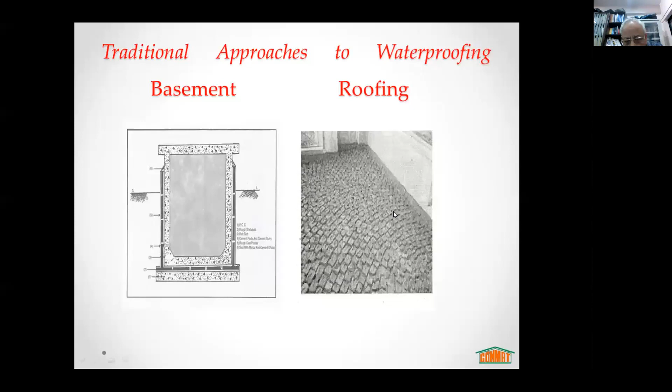What happened was that when we started doing waterproofing of buildings and concrete structures, we primarily focused on basement and roofing. These traditional approaches made use of materials that are really conventional, for example brickbat coba, mud phaska, lime concrete, China mosaic tiles for roofing purposes. For basement, box type construction using Shahabad stone or PCC or similar kinds of materials. With these materials, what we ultimately try to do is create some water barriers, but we certainly do not do the waterproofing as we understand today.

With these kinds of approaches, there is a lack of durability first of all. Second, there is a lot of additional dead load on the system itself, the building structure. And obviously the repair and maintenance is a big issue. The approaches are essentially very cumbersome and labor intensive.

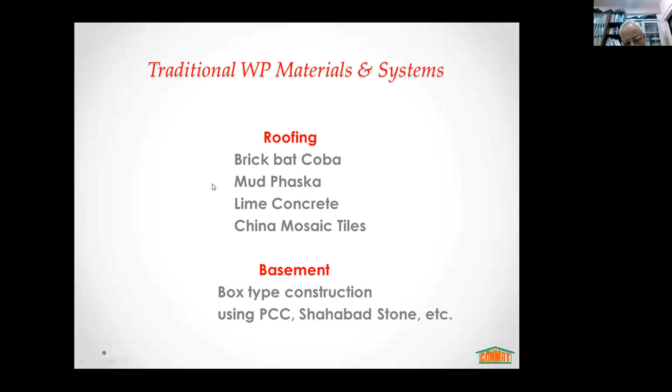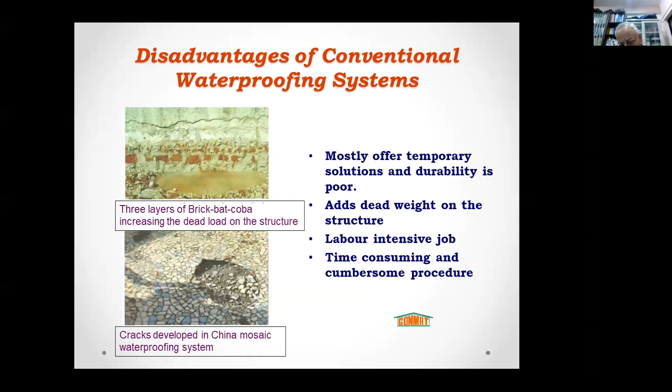So progressively what has happened is that we have tried to avoid some of these disadvantages of conventional waterproofing. This has been possible with the concept of building envelope. The concept of building envelope is that you don't really consider individual elements of the structure for waterproofing purposes. All that you do is consider the entire structure as a whole, and try to take care of the substructure and superstructure, or below grade and superstructure, and also all the joints, flashes, seams, etc.

So you take a holistic view of the entire building envelope. Here it's not only preventing water infiltration, but you also try to control water vapor transmission, heat and airflow in and out of the interior spaces, providing a shield against ultraviolet rays or excessive sun rays. Structural integrity is a very important part of the entire building envelope, and you also take care of the necessary aesthetics in your construction and structure. That's how you look at the building envelope as a whole.

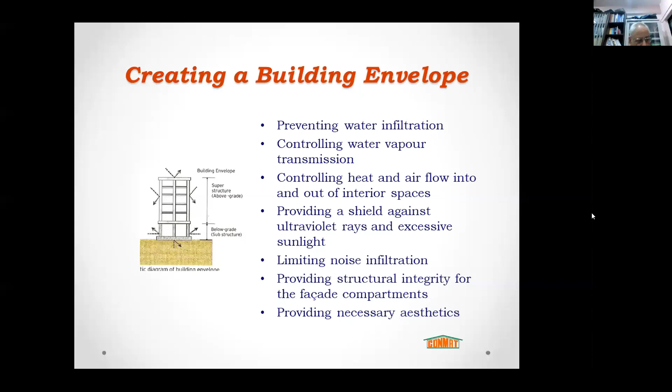Just to refresh your mind, we talk about two systems: the waterproofing systems and the damp proofing systems. The intrinsic difference between these two is that waterproofing protects us from the hydrostatic pressure of water. When there is no hydrostatic pressure, but you resist the passage of water, we talk about damp proofing. I specifically brought this in today because sometimes we use these two as synonymous, and sometimes very loosely. I even see an ad these days where two persons are talking - one about damp proofing and the other about waterproofing, but both are talking in terms of the damp proofing material. So to that extent, we need to differentiate between these two.

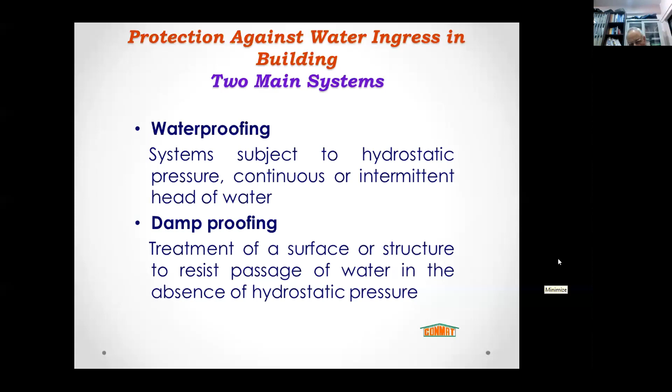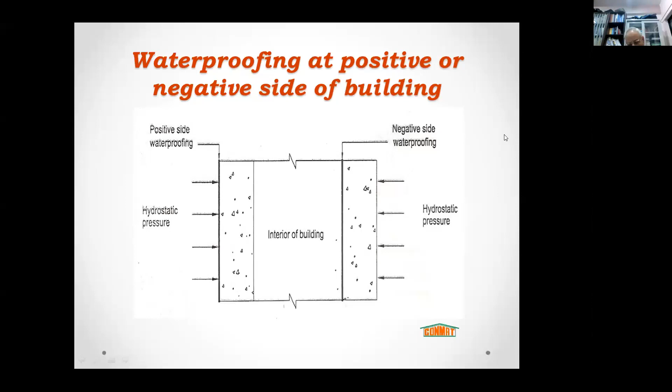Another basic thing to which I would draw your attention for understanding the rest of the things is about positive side waterproofing and negative side waterproofing. On the hydrostatic pressure side, if you are putting the barrier between the source of water and the interior of the building, that's the positive side. When you are doing interior barrier with your concrete and the source of water on the other side, we talk about the negative side. By and large, for all practical purposes, when we talk about basement or roof or anything, we are essentially talking about positive side waterproofing, although the negative side also has to be considered for the basement part, where the walling is inside the ground and there is no other way of doing the positive side.

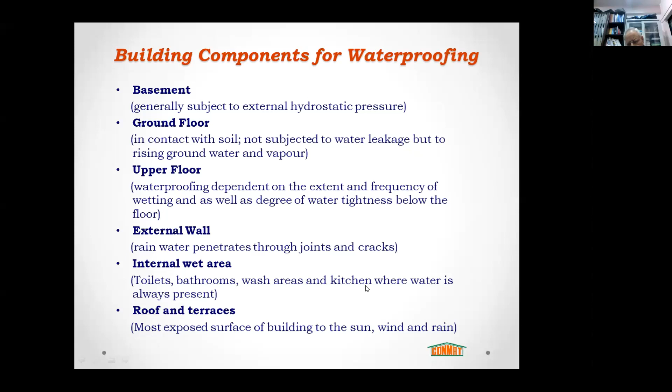When we are talking about the internal wet areas, we are talking almost all the time about water being present in the system. Roofs and terraces, it's not only water, but sun and wind have their own effects and problems. So it's not really one shoe fitting everyone everywhere. You have to really think about different treatments, different materials. You will have to observe the demands of that structure or building component and proceed accordingly for the waterproofing. But ultimately, you have to bear in mind that you're looking at the total system in a holistic manner, and not just a part or component of the system.

With these initial words, I thought I'll just now say a few things about the modern waterproofing materials and systems. It's simply mind-boggling. Let me start off mentioning about that, let me start with the first one.

Let's talk about the preformed sheet membranes, because this has been again a conventional approach, particularly for roof waterproofing, or even for that matter in the basement. What we started off with was the hot applied built-up bitumen and felt membranes, in other words, the bitumen saturated felt layers were joined also with hot coal tar pitch or with oil derived asphaltic bitumen. So these kinds of systems have been in use for a pretty long time, and it's not that they are not being used even today. But the trend is that from, say, the 1990s, these kinds of systems have lost their popularity, particularly because of the release of VOCs, or volatile organic chemicals, which cannot be totally avoided in this system. And that's a taboo environmentally.

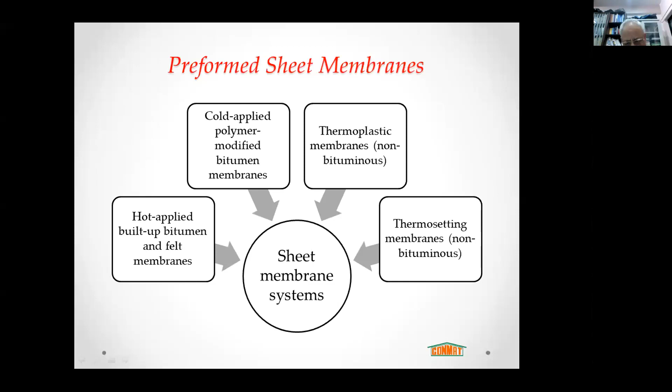So as a whole, if you see today, the polymer world has opened up a very large window for waterproofing, while earlier we were more focused on either coal tar pitch or bitumen, asphaltic type. We have now progressively moved towards even non-bituminous systems and total polymeric systems, but these are also complex in their synthesis and making. However, they have made a sea change in meeting the environmental demands.

But the preformed sheet membrane technology has its own limitations, particularly the vertical application of these materials becomes a big issue, big problem. In fact, blind walls become a big problem. So therefore...

The further developments that have taken place move towards liquid applied membranes. And when we talk about liquid applied membranes, we are not really changing the entire concept of chemistry—the chemical concepts we talked about, either the polymer modified bitumens or the thermosetting and thermoplastic polymers.

In fact, we have added further the silicone variety to that, and we have added polyurea to the entire group of materials. With that, today we can make either bituminous binder-based liquid applied membranes or coal tar pitch-based liquid applied membranes.

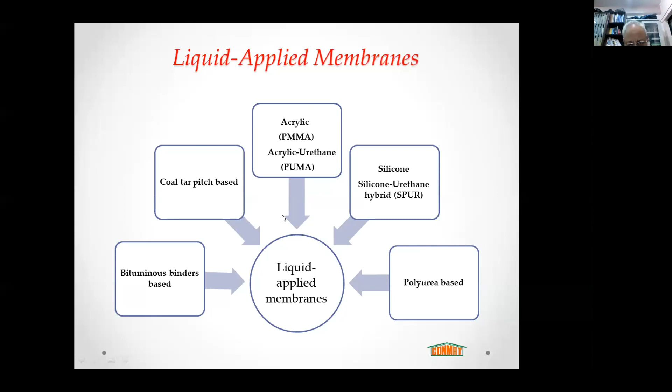The third category, which has added to the entire world of options in waterproofing, is what we call integral waterproofing materials. And here, it's my reminiscence that my company, ACC, was the first in India to introduce integral waterproofing, in a manner of speaking, at the technology level available at that time. I'm taking you back to 1959, when ACC introduced a product called AquaProof.

This was basically a lime stearate type of material for integral waterproofing of concrete. You can imagine how far-sighted an approach the company had even those days. But I'm very happy to learn now that technologies have improved, the knowledge of chemistry has improved, and today ACC has come back to integral waterproofing systems.

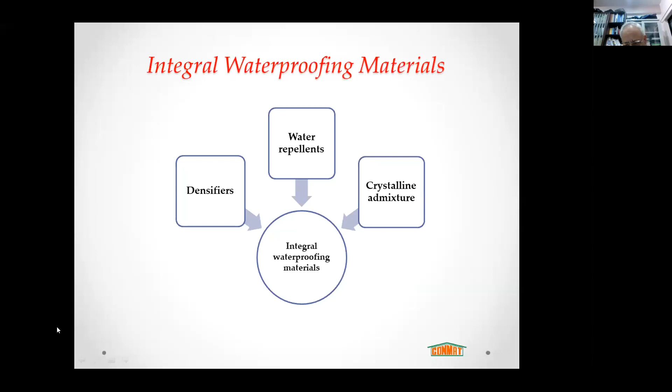That's the clay-based waterproofing system. Unfortunately, it's a highly potential area, but least worked upon and least researched, according to me. What we are practicing in a limited manner is the bentonite-based waterproofing systems. Here, either prefab panels or trowelable mixtures, all kinds of things based on bentonite composition of clay are available, and they may be made use of.

That's known to a certain extent and practiced also to a certain extent, but being worked upon very intently in some research areas are the asphalt clay emulsions or rubber clay composites. These are the kinds of materials which will go a long way in meeting our environmental challenges and demands, particularly if non-bituminous. A lot of work is being carried out on this system, but it hasn't really come to much practical use.

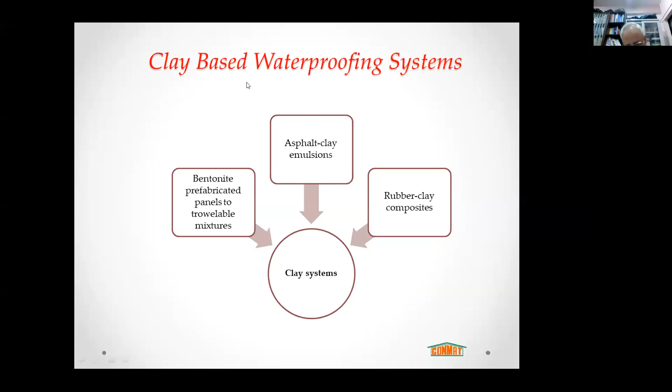Next one, please. The other part I thought I must quickly go through is the joint sealing solutions. You need not be told, I believe, as civil engineers, that joints are the weakest areas in our structures, unless you have handled them very correctly from the very beginning. You need the right kind of material for the right application for solving the problems of joints. Here also we have a plethora of choice.

For example, the sealants can be silicone-based, urethane-based, acrylic-based, or polysulfide-based. There are many options, and within each, there are multiple options. Particularly, what is being widely used is the polysulfide-based systems. Polysulfide, for the non-chemists here, is basically a complex chemistry of sulfur and hydrocarbons, and that's the kind of material very much in use.

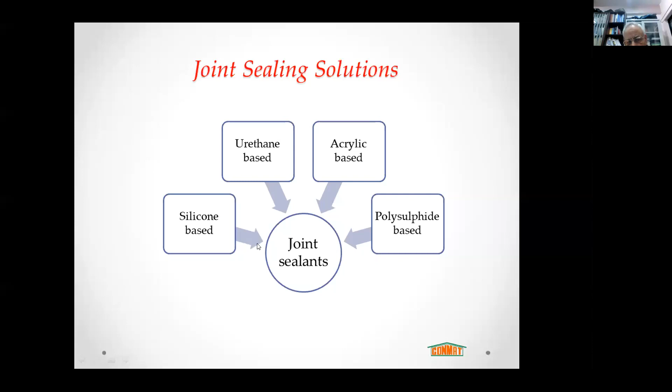Apart from these, next one please. I must quickly take you at least to the title, polymer modified cement and concrete. This is again a hugely potential area where you use either a latex, redispersible polymer powders, or water-soluble polymers, and you can really change the behavior of your cement and concrete, particularly for concrete decks, or for that matter, even concrete wall blocks or swimming pools. These are some of the areas where these kinds of materials provide a lot of advantages. It's not just will provide - they are being used in many circumstances, particularly in bridge decks and all that. But still, there are many reasons why it is not being used to the extent you need to use them.

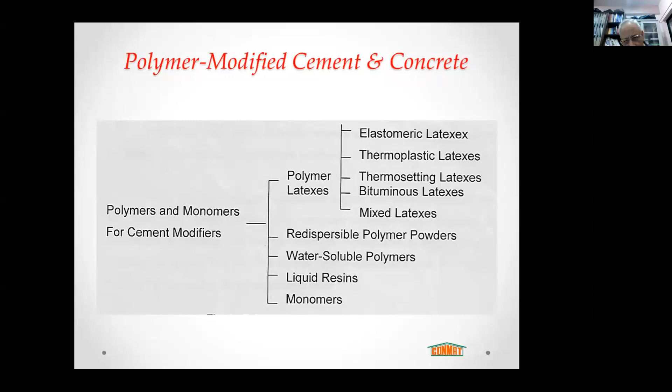Next one, please. Let me quickly take you through the specific advances that we have talked about. We have talked about the bitumen modifications, the bitumen to polymer transition, the single-ply TPO roofing membranes or thermoplastic polyolefin roofing membranes, and the latex composition expansion - a huge expansion available before the formulators. But what is extremely important is the high performance acrylic polymers, polyurethane versus polyurea, siloxane and silicones, and polysulfide polymers we have talked about.

Now, the acrylic polymers today are considered almost synonymous with high performance polymers. Why? Because basically the material can be formulated in numerous ways, and it can be really hybridized with many other materials, and you can really create wonders with the acrylic polymers.

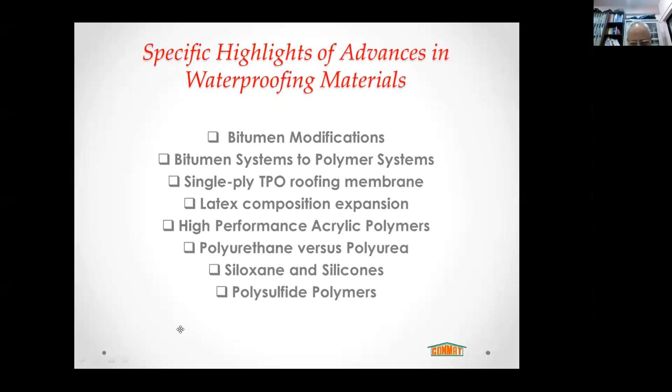Shantanu, do I have a little more time, and can I cover a few more slides? Sure, sir, sure, please continue. Okay, yeah, sure, please continue. Let's come to the next one.

Since the material choice is extremely wide, you need to have the right criteria for selecting the materials. Material properties, particularly permeability, tensile and elongation properties, resistance against atmospheric and sun exposure, resistance against perforation and laceration, and durability against aging and exposure conditions - to my mind, these five material properties are extremely crucial, and they vary from product to product, and we need to look at some of these things properly.

But that by itself may not really give you a satisfactory result, because there are substrate conditions which need to be really looked at. What kind of usage we are going to put this material into is important, and what kind of environment these materials are going to face - that again is very critical.

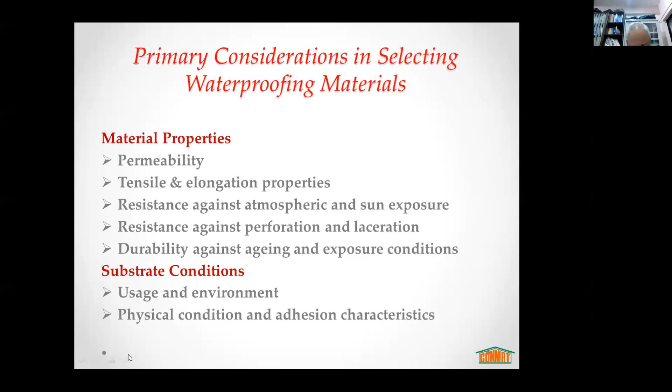Next one, please. Yes, sir.

Today, for the time that's available, I thought that on the material side, I shouldn't really trouble all the leading civil engineers with too much of organic chemistry and material science. I might give you some examples of environmental benefits that we are deriving and can derive more effectively from advanced waterproofing systems.

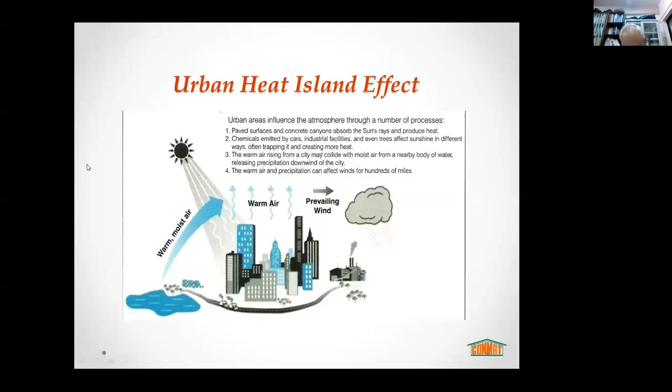So you need to really tackle the central part, that's the commercial and urban residential area. That's a very important segment that we need to look at. Next one, please.

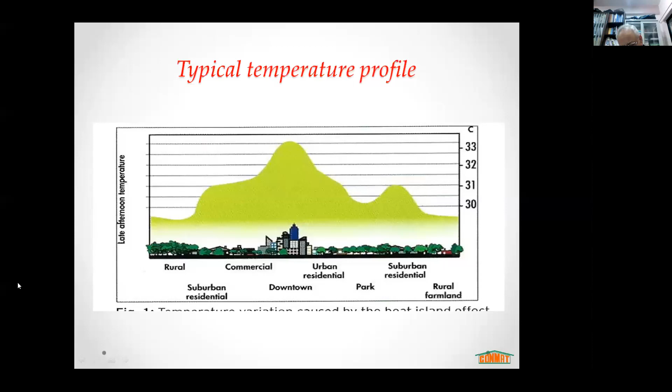And this is one of the ways in which it is being tackled and can be tackled more significantly, that's the reflective cool roofs.

And with that kind of a system, you have also got several other consequent benefits. For example, if your system is air conditioned, you reduce the air conditioning load in the system. You can also give longer life to the roof itself, because the day-night temperature fluctuations you can substantially reduce with this kind of a cool roof system, and then you derive a lot of benefits from systems of these kinds.

And today, as I mentioned to you earlier, acrylic polymers have opened up new vistas. So the reflective cool roofing, that's one of the tools available with the formulators. You even have, say for example, polyurethane fortified acrylics. That kind of material you can do. The TPOs we have talked about. These are the kinds of materials which have opened up new vistas.

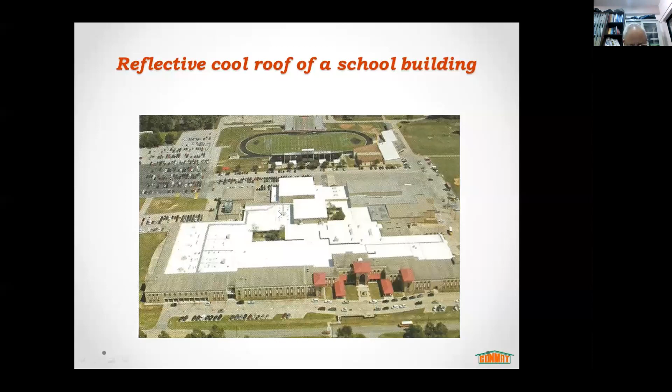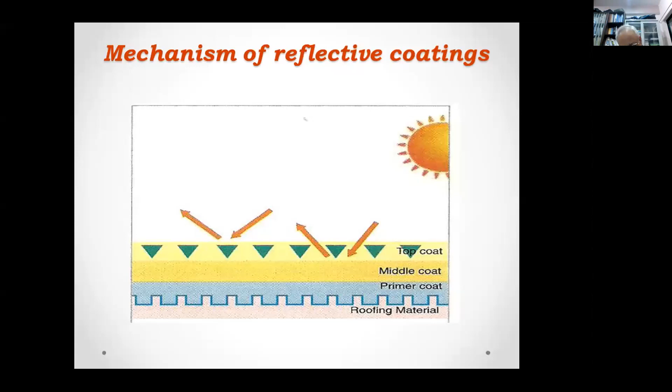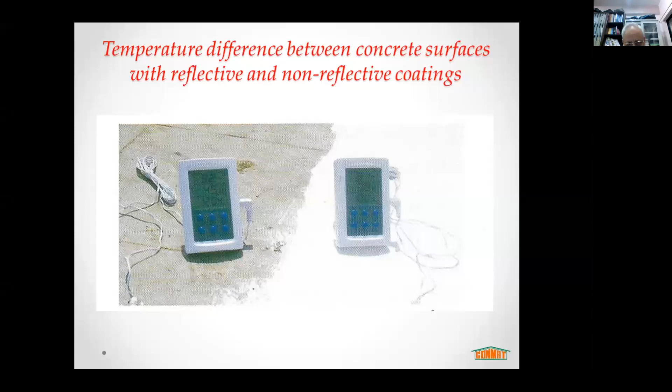The other system that I must make a mention of in today's talk is garden roofing. Garden roofing, or green roof, is another savior for urbanization, according to me.

There are different varieties possible, and normally we differentiate 3 types. One is shallow, where the root of the vegetation doesn't go beyond 150 millimeter. There's a moderate type, between 150 to 250 millimeter. And even deep root vegetation, where it's more than 250 millimeter.

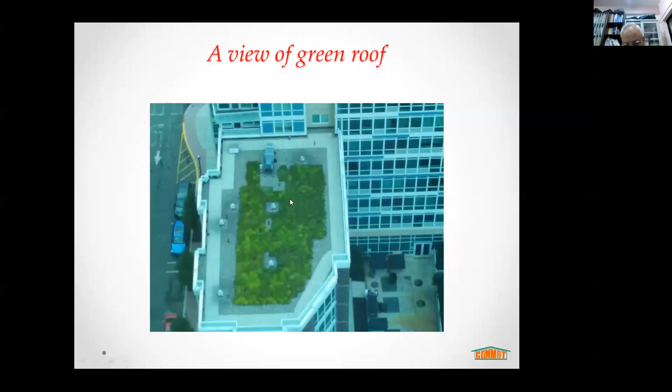For example, the next one shows a shallow vegetation roof. Here you can see a deep root vegetation on the rooftop, and this kind of system is also possible. Now, this is much simpler to say than to do.

You can imagine that the systemic design, development, and execution for green roof is a challenging task that needs to be done properly, with full understanding of structural integrity, the materials applied, the system design, and the execution part of it.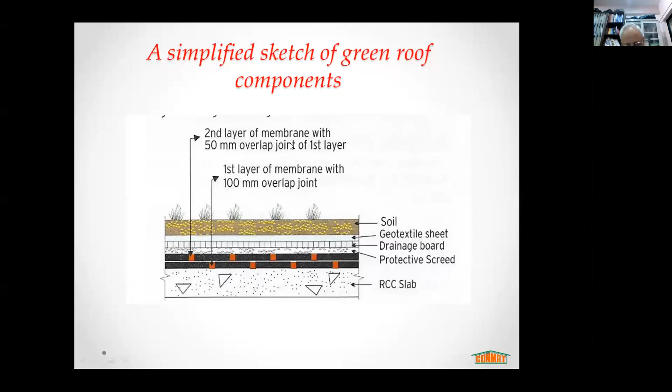Whereas an extensive green roof assembly requires a much more thought-out and well-designed total system, starting from the structural deck to the vegetation. I will not take you through each of these details, but just to give you an impression that there are materials and it is possible and one can do that.

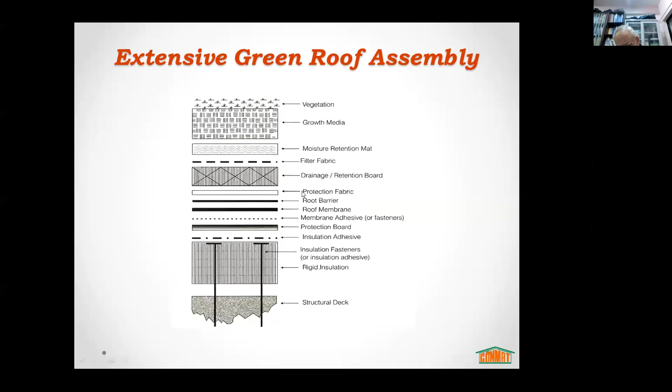Maybe I missed a slide, or maybe it's coming next. In India, many of you would have visited the CII Green Business Center in Hyderabad. That's the first green roof project in India, and it was pretty well done by them. I'm talking about almost 14, 15 years back, and it has been a good system. I'm sure there are many other examples available today.

Let me quickly take you now, with these 2 examples, to the market size we are talking about. The global market for waterproofing in 2020 is estimated around $33.5 billion. It's not the material alone, it's the total waterproofing market. You can imagine it's a very large global market.

Despite all the problems through which the entire world is moving, it's expected that the CAGR would be somewhere over 5%, and we might come close to 39 billion US dollars as the market size in 2025.

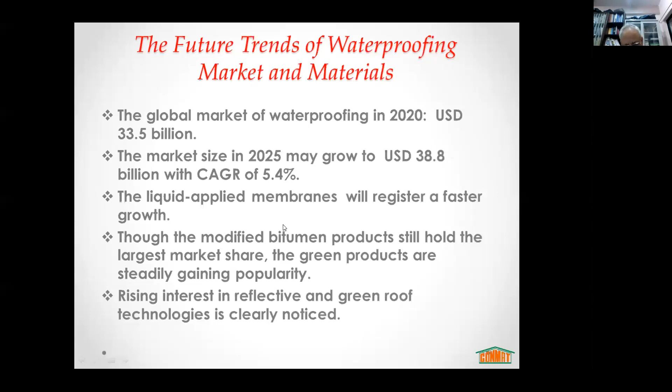As I mentioned, there is rising interest in both reflective cool roofs and also the green roof with roof gardens.

There are several health and environmental concerns in the waterproofing industry. This cannot be overlooked. These concerns have been there for a pretty long time, for decades, I must say. The concerns arise basically because most of the products are derived from petroleum sources. That's why I mentioned that clay-based systems have a potential which you need to really explore progressively.

The trouble of health and environment also comes from bitumen-based membranes, and the various solvents and diluents that we make use of. The problems also come from some application technologies. For example, spraying technology looks very practical and helpful, but has a lot of environmental implications. Heat-applied systems, particularly torching, also have their own environmental implications. So those things are being addressed and will be addressed progressively.

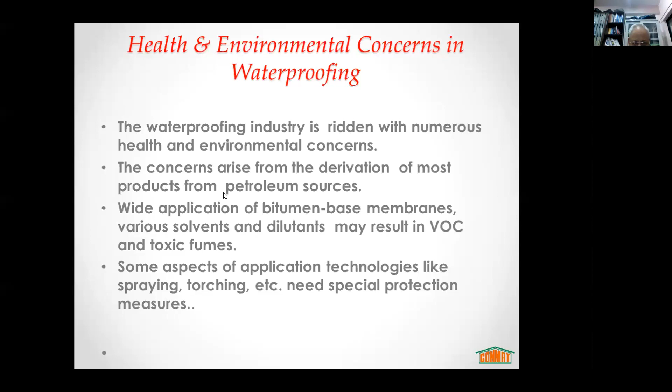So therefore, let me not tax you and your patience beyond this level. Already I've spoken for a pretty long time.

All that I'm trying to say is that materials are not enough. Engineering practices, good engineering practices, are essential for the design, selection, and installation of suitable types of waterproofing systems. The durability and effectiveness comes from the right selection, design, and workmanship.

The advent of new and improved waterproofing systems and products needs to be focused on much more than what we have been doing so far.

Finally, there are ternary objectives in waterproofing. One is effective performance, second is environmental protection, and third is aesthetics. This ternary objective cannot be lost sight of when we are talking about waterproofing systems in our civil society.

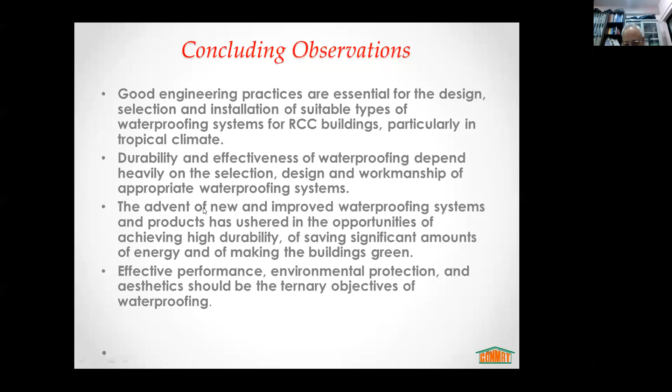With that, let me thank all of you. I forgot to mention, at the very beginning, Shubhajit, my close friend, Professor Saraswati, who is also present today. It's very nice that he is there today. Many of you I haven't met for a pretty long time. In fact, in the last 1.5 years I've been virtually homebound, couldn't really meet up or join physical meetings here and there. Hopefully we will pass through this crisis and have opportunities of meeting each other more closely and physically. Thank you.

Thank you so much, sir. I think that was an excellent and very exhaustive presentation. And yes, very rightly, sir, you have said that the material is not enough, the application system is more important to get the best results. Thank you, Dr. Chatterjee. We have a distinguished panelist now. I will first take comments from the panelists, then we will go to the question and answer session. First I request Professor Saraswati, past president of ICI, to comment on this presentation or give any feedback.

Thank you, Dr. Chatterjee, for such an excellent presentation. I've been listening to your many presentations over the years, and every time I get totally absorbed because your way of presenting is always excellent. So today's presentation is also extremely useful to practicing engineers, because you have discussed the entire gamut of waterproofing applied to different parts of buildings. That is very important.